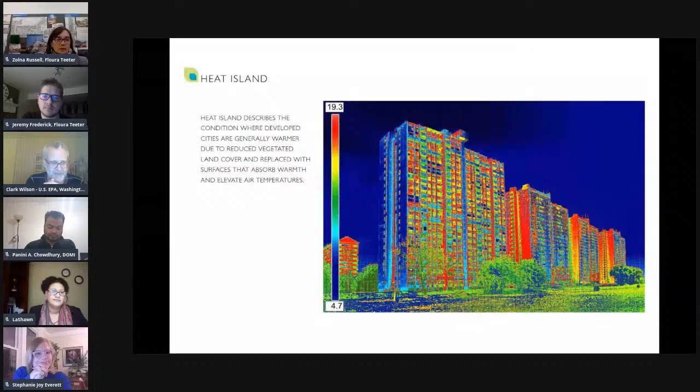We've only given 4 awards a year. So Pittsburgh is joined this year by Birmingham, Alabama, the Shoshone-Bannock tribes in Idaho, and Bernalillo County in New Mexico. Those are your cohort for this year. For the Greening America's Communities program, we also hire landscape architects who have expertise and skill in the design of green infrastructure and incorporating it into neighborhood and street design. This year, we're happy to say that we hired Floura Teeter landscape architects, based out of Baltimore and Pittsburgh. Tonight, you'll be hearing from Zolna Russell and Jeremy Frederick with Floura Teeter. Take it away, Zolna.

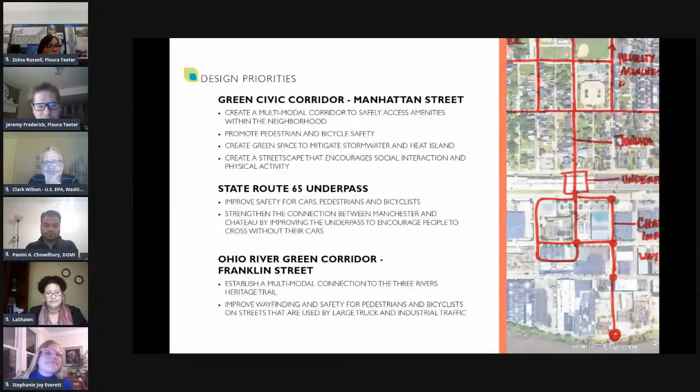So as I mentioned, we did develop a number of model strategies. And the reason we did that rather than jump right into planning is because it is a long corridor, and the character is quite different in Manchester from Chateau, as I'm sure you know. And we really don't like to go ahead and make assumptions about things.

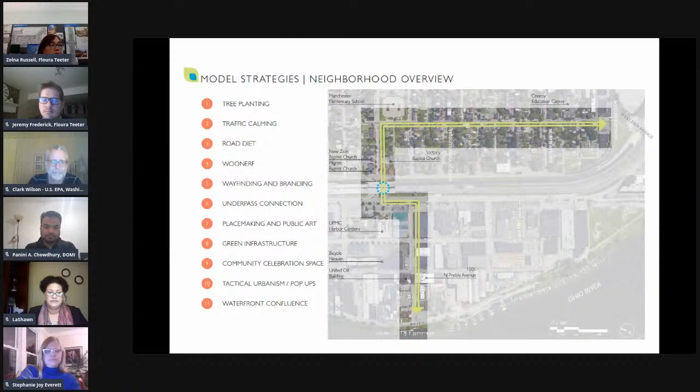So we do want to have community input to inform the process. So we came up with these 11 model strategies and then put that on the Engage website. And then the sites were chosen based on where we had the most interest based on the comments on the Engage website.

And as Zolna said, we provided the interactive map to see which strategies seemed appropriate for your neighborhood and where they might be the best fit. In total, 21 markers were placed, which really provided a data set for us to understand your priority locations and the strategies of greatest interest.

So just to pull out a few again, tree plantings were placed in Chateau, again echoing the need for increased canopy in that neighborhood, along Route 65 and in front of the elementary school. Traffic calming was placed at Chateau Rush in front of the elementary school with notes that traffic in front of the school can be dangerous at times.

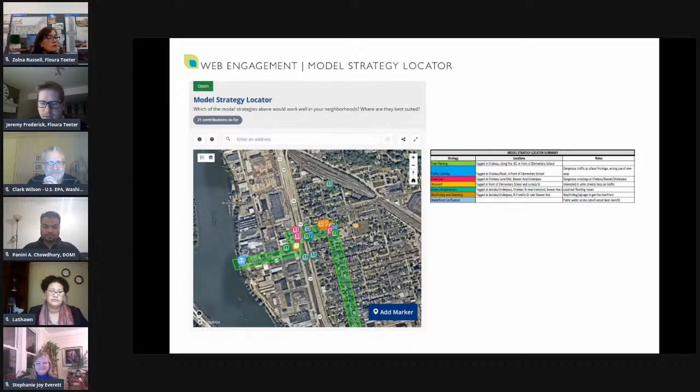So you can really see where the interest is clustered, and we'll talk about where we've actually chosen the sites in a second, but that feedback was really instrumental in not only choosing the sites, but also deciding what we would design for the sites.

And so was the information that we received in the small stakeholder meetings, which is where we get to dig into a lot of detail. So not only did the small stakeholder meetings inform where the concepts were located, but also the levels and types of intervention, as well as a lot of really great information about maintenance and stewardship and potential funding sources. All those things will be included in our final memo.

So now the big unveiling. One thing that we've heard a lot is that Manchester feels very disconnected from Chateau. And the character of Manchester is very historic and very residential, and Chateau is very industrial.

So what we felt was really needed were unifying elements that could be carried through both Manchester through the underpass into Chateau. Things like the brick sidewalks in Manchester, providing site furniture in both Manchester and Chateau that's the same, creating a unifying element, consistent lighting throughout on the Manchester streets and all the way through to Chateau, and providing better bike facilities, whether bike lanes or sharrows, again to create that very important connection. So you'll see that in all of these plans.

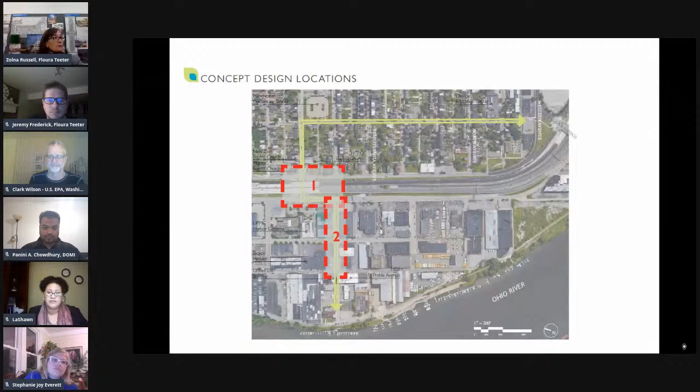So the first site is the underpass, and we are calling it the connection because it really does restore the connection between Manchester and Chateau, or create a connection, where there used to be one neighborhood.

This is an adaptation of one of the model strategies. What we heard from the small stakeholders was that the model strategy was a little too much intervention, in the sense that it really changed the traffic patterns and was going to require a lot of traffic planning and other infrastructure changes.

So we scaled it back a little to keep the lanes more or less as they are. We narrowed them a little, which will also provide some traffic calming, but it still provides the same turning radii for large trucks and other large vehicles. We've provided a very strong pedestrian connection through the underpass.

On Juniata, we have shown curb bump outs, which continue around to where the lane diet already exists, which allows us to put in some trees and green infrastructure. It gives more of an area of refuge for pedestrians and narrows the crossing.

There are crosswalks throughout. The brick is carried through in the underpass along with ornamental pavers, and continues on here. This is very well lighted, so there's a lot of lighting included. You can see there are also benches, plenty of space for pedestrians and bicyclists to feel comfortable. Two low walls on either side can be used for branding or decorative purposes, and that continues.

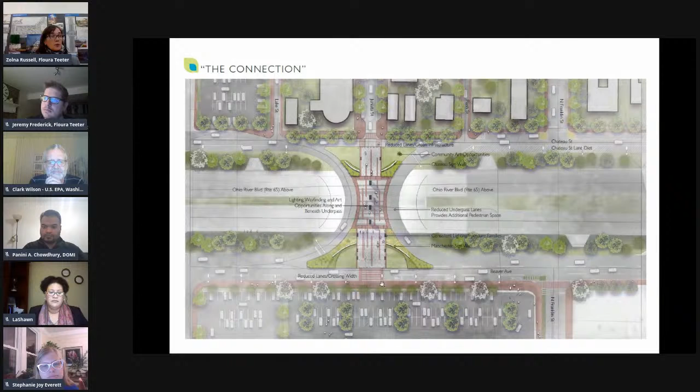We've looked at it both in the daytime and in the evening, so you can see what it looks like with the lighting. We've provided bollards here that have lights on them. It's a much wider pedestrian way. These are the low walls I referred to. These show the bump outs, so you can see that the crossing feels much more accessible.

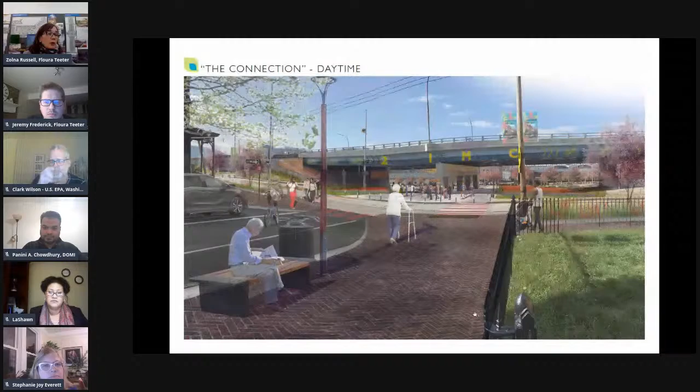That could be accompanied with pedestrian lights further up Chateau to let people know somebody's crossing. The lights and furnishings are included throughout the corridor here. And then the potential for branding of the neighborhood or signage on the bridge, as well as on the abutments, can really create branding or wayfinding for people coming from Manchester through Chateau and vice versa.

The second site we've called, tongue-in-cheek, Trailer Park, and I'll tell you why in just a minute.

So what we've done on North Franklin Street is looked at it both from a weekday perspective and a weekend perspective, because what we heard from some of the people there is that the trucks and industries operate fairly heavily during the week, but on the weekend they don't. So the streets are pretty empty, and it gives an opportunity to activate on more of a timed basis than a permanent basis.

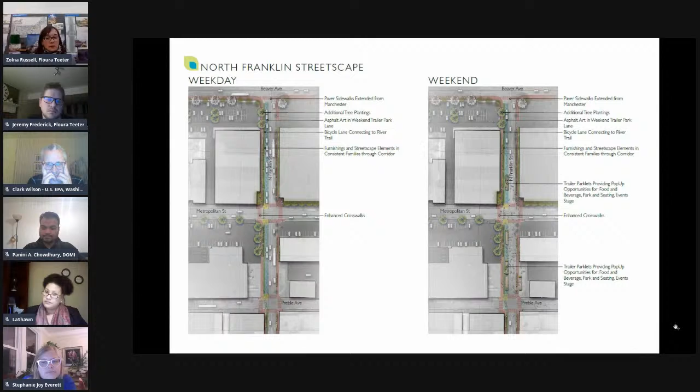So you can see they are shown parked here, and then the roads could be closed so people could hang out, do cornhole, have movable seating. And this is what that might look like.

So you can see the trailer parklets with people hanging out in them, lots of people in the street. The connection to the river becomes much more accessible at that point, and it really does activate the neighborhoods.

So we've shown tree planting where it is possible. In Chateau, there are a lot of driveways and overhead lines there, so the opportunity for that is limited. But between the sidewalks and the bike lane, it does kind of make that connection and lead you through.

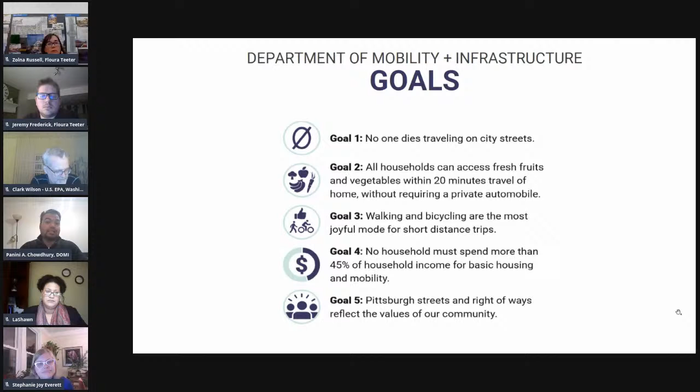If you rely on biking or walking instead of driving, it's not going to cost you, so we want to focus on that. The fifth and last goal is that we want our streets and rights of way to reflect the values of our community. Next slide, please.

The Move Forward PGH project is initiated from the Pittsburgh Bike Plus plan, which started around 2014 to 2015. It's close to a 5-year-long plan that we developed, with almost 750 people engaged. We went through all the communities through this Bike Plus plan to better understand community needs, and the end result is almost 123 miles of planned on-street bike facilities that we are proposing through the Move Forward PGH project.

We call it Bike Plus instead of just Bike because we are also trying to facilitate e-scooters and micro-mobility facilities - we want to create infrastructure that covers those modes of transportation too. As you can see on your right, there is the proposed north side study area that I'm going to talk about today.

Sometimes, like when we go to a presentation, every time we hear, like, if you do only this quarter mile, what will happen? That's the reason I want to put this map in there, just to give you the idea that all this project we are implementing is actually part of a much larger and greater network. Manchester Chateau neighborhood is actually a premium connection location for the north side.

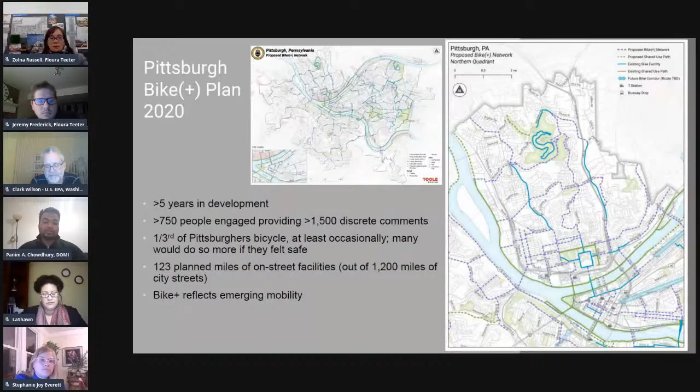Next slide, please. A little bit about this Move Forward PGH project. This is an initiative from the Department of Mobility and Infrastructure of City of Pittsburgh. We also have two nonprofit partners, Healthy Ride and Bike PGH. Some of this project are grant funded, and some are from the city operating budget, so it's a mixed bag of funding for these Move Forward PGH projects.

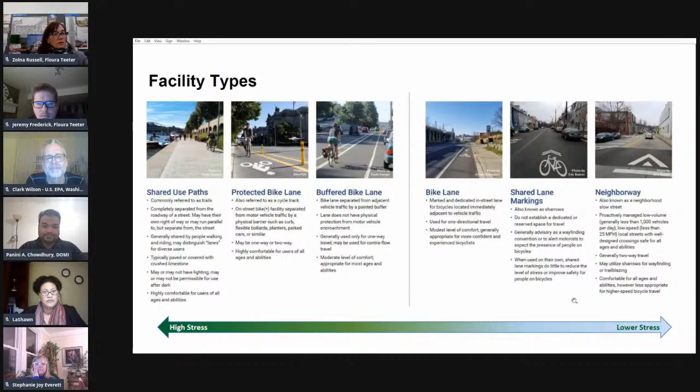Next slide, please. So next slide. Before going to the specific projects, we are going to introduce 8 projects today.

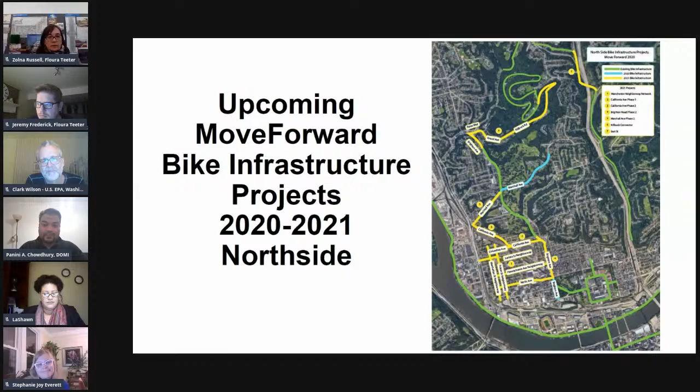A little bit of zoom up for the 8 projects we are proposing today. The first one is West North Avenue, with the study scope from Manhattan Street to Brighton. The second one is Brighton Road, which will run from West North Ave to California Ave.

We have 2 more projects coming on California Ave that will go up to Marshall, connecting to the Marshall Avenue project already in the design phase for 2020. We have 2 more projects coming from the east-west direction: one from Manhattan, the other Fulton Street. Both will start at Western Ave and connect into Juniata. Then we have another connection from Columbus Avenue that will connect Manhattan Street to California.

As you can see, Manhattan and Juniata streets are really the 2 most important corridors that will flow traffic from the east side. Manhattan will connect North Ave, Pennsylvania, California, and Columbus Ave through Fulton Street, and all those connections will get connected on the upper side to the River Park Trail.

And for the east-west, north-south direction, you have the Fulton and Manhattan connection. They will ultimately get connected to the Three Rivers Trails through Beaver Avenue and North Franklin Street. That's the reason we are here today with this EPA project, to introduce all these projects and see where they're ending—that's exactly where we're starting. This is a complete, cohesive project for the whole north side.

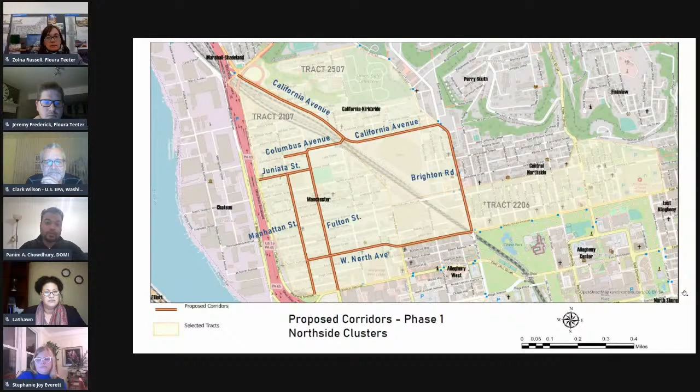Before going into a little more detail, I want to talk about the demographics and community character of the neighborhood. In the previous slide, you saw the 8 corridors selected for today's presentation—they mostly cover 3 tract groups. So we collected data from the American Community Survey to better understand the community, the population, and their commuting characteristics.

On average, 20% of the households in this tract group have 0 vehicles. So for those households, bike facilities are not just for recreation—it's actually their work trip.

When it comes to the drive-alone mode, only 44% of people actually drive alone. So almost 56% of the people in this tract group rely on other modes of transportation, whether it's public transit, walking, or biking.

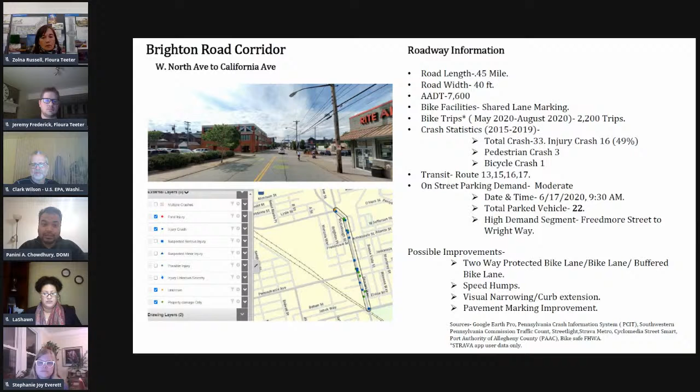So what type of facilities can we consider for this road? It's close to 8,000 vehicles and people use it frequently, so you don't want bicyclists sharing this road if possible. With a 40-foot road, you can consider a 2-way protected bike lane, which only takes 10 feet on one side, while you still keep both travel lanes and the parking lane.

For the California Avenue corridor, from Brighton to Marshall, the road is around 30 to 40 feet wide and moderately busy, with an ADT of about 6,500. People use that road for bike trips too; over 4 months we got around 900 trips through Strava. Safety-wise, it's not the most vulnerable road, with only 12 crashes, 1 pedestrian crash. There's a transit route there as well. Along that 0.8 mile corridor, we observed about 25 vehicles parked at that specific time, with the highest demand segment near the USPS surrounding location.

So what are the possible alternatives we can consider there? We can consider some sort of bike lane, a buffered bike lane.

If bike lane is not an option here, we can look into traffic calming measures, known as neighborways. We can look at speed humps, visual narrowing, pavement marking, or road reconfiguration related work for California. But these are just possible improvement options, not hard and fast recommendations. We want to hear from our stakeholders what they're thinking based on this information and their daily usage of that corridor.

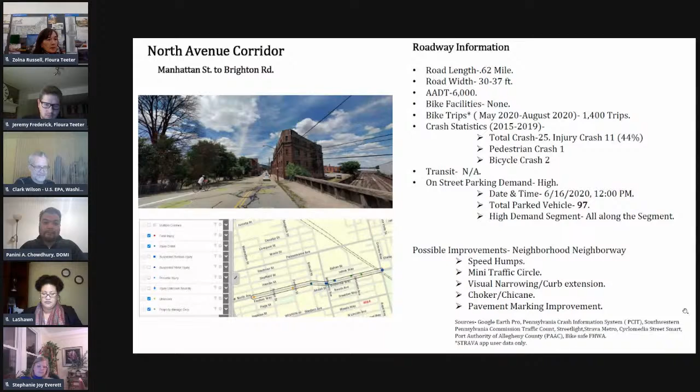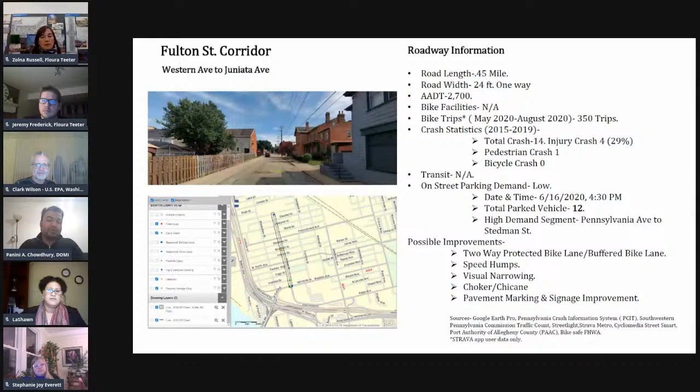Even if we cannot put bike facilities there, we could do traffic calming to make the road safer for bicyclists—speed humps, visual narrowing, pavement marking, or signage improvement. This simple improvement can also make a huge impact to ensure safety of our road.

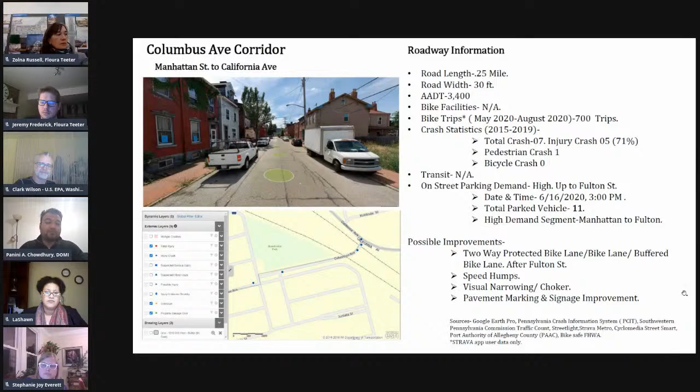But parking is a major factor for a location like Columbus Avenue. We could create one-side parking with one-side opening for vehicles, or go with traffic calming measures for this type of location, since it's not a very high-speed corridor and has very intense parking demand.

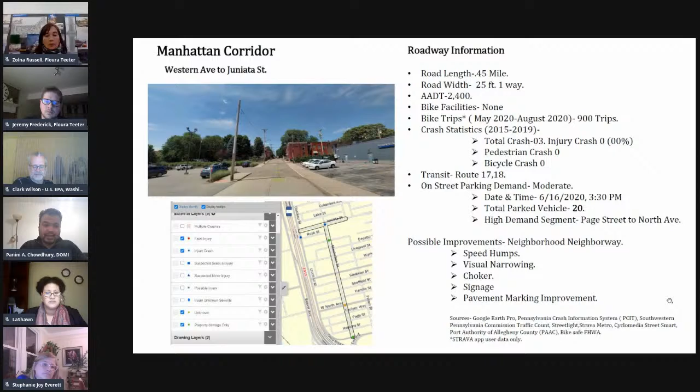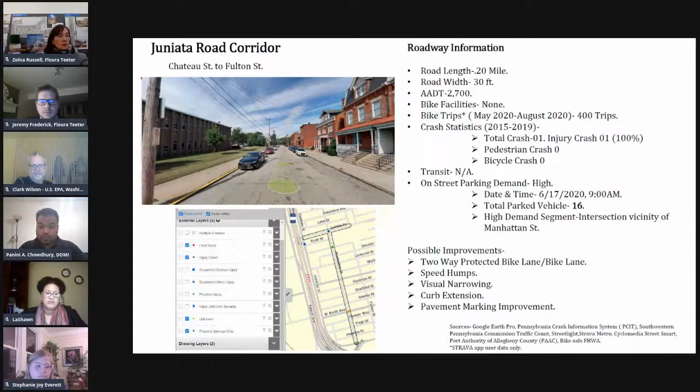Crash-wise, it has only one crash, so it's not a safety hazard per se, that corridor. What type of facilities can we consider for this? First, we have to look into the parking data. What we've seen is it's a high demand segment, especially near the intersection vicinity of Manhattan Street. So our recommendation could be creating one side parking and opening the other side for bike facilities, or doing a traffic calming project incorporated with pavement marking improvements.

Next slide, please. So these are the 8 projects that I want to introduce to you all today. As you can see, we are not here today to give you any concrete design or to tell you what we should put in your community, on your road. We just want to share the information we have access to, and gather the information you have as daily users of those roads - what should be the most appropriate countermeasure that we can take to make those roads safer for both motorists and bicyclists, and also the pedestrians who are going to cross that road.

For the comment period, we have 2 different platforms at this moment. Unfortunately, due to COVID, it's not possible for us to go in person to the community and collect comments. So we've created 2 pages: one is the Engage PGH page - I'll drop the link after the presentation in the comment section, and it's also available in the presentation that will be posted after the meeting. We also have a page for Move Forward PGH where you can put your comments.

On the Engage PGH page, there's an interactive map in place that you can use to place markers, the same way we did for Manchester and Chateau. Our comment period will begin today, and we're expecting about a 1-month comment period from the people. After we collect the recommendations and suggestions from the stakeholders, we'll move to the design phase and probably come back to show you what we've designed for this project.